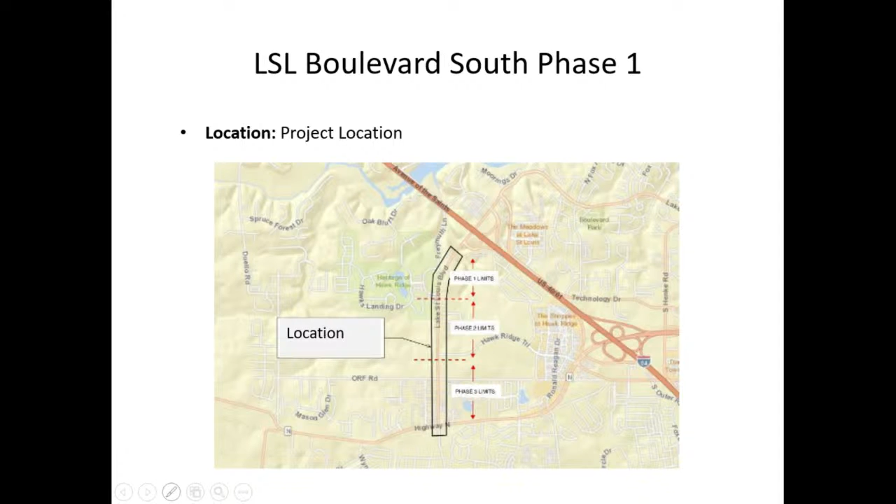We have one project that we're submitting. It's Lake St. Louis Boulevard, Phase 1 South. On the screen is the project location map for the entire project. The application is for Phase 1, which is the northern section of the project.

I'm going to start with a little background information from the study that the city just recently completed. We had Oates and Associates and CBB do a study on the Lake St. Louis Boulevard corridor to tell us what type of improvements we need to handle the traffic and future development in the area, as well as look a little bit at some of the surrounding transportation network.

Starting with the existing conditions, we have an existing 2-lane roadway with shoulders and open drainage along the majority of the route. The eastern right-of-way line has a bike path located along it, and on the western right-of-way line there's intermittent sidewalks.

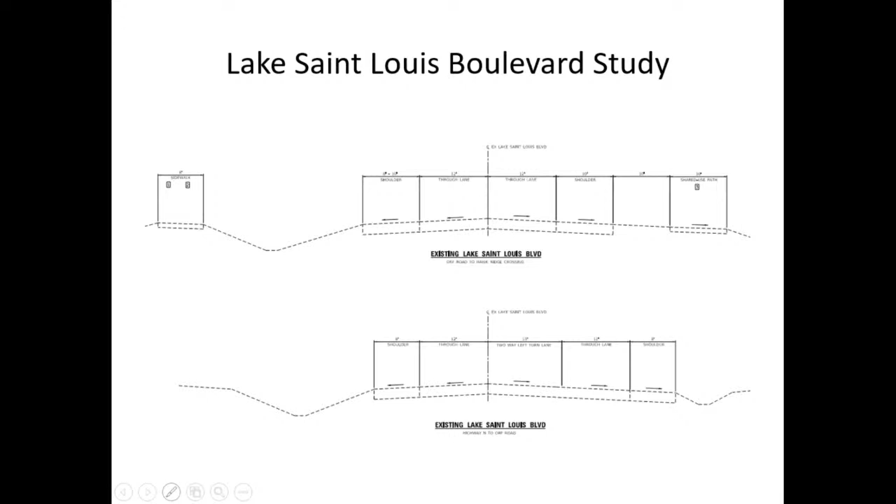So the plan for the next few years will be applications for phases of Lake St. Louis Boulevard that will be 3-lane sections, preserving the right-of-way for the ultimate 5-lane section, and setting the sidewalks and bike paths out at the edges of the right-of-way line to try to establish the limits of the boundaries of the corridor so the adjacent property owners have that expectation and understand where their property ends and where the city's right-of-way starts.

The study also looked at locations where we can allow signals in the future. It's important that we pay attention to where we allow signals so that we have adequate spacing between them and things function well, and looked at some connection points that we need to make in the surrounding road network.

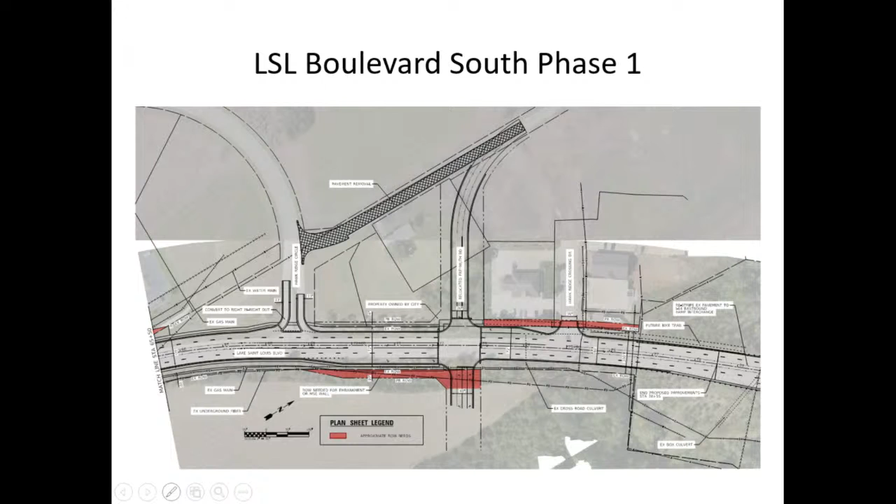The existing Freemouth Lane, we haven't firmly decided whether that will be removed or whether it'll become an access point for development at that location, a driveway access for the east or west side of that road, or a cul-de-sac. We'll have to figure that out, probably in consultation with the property owners.

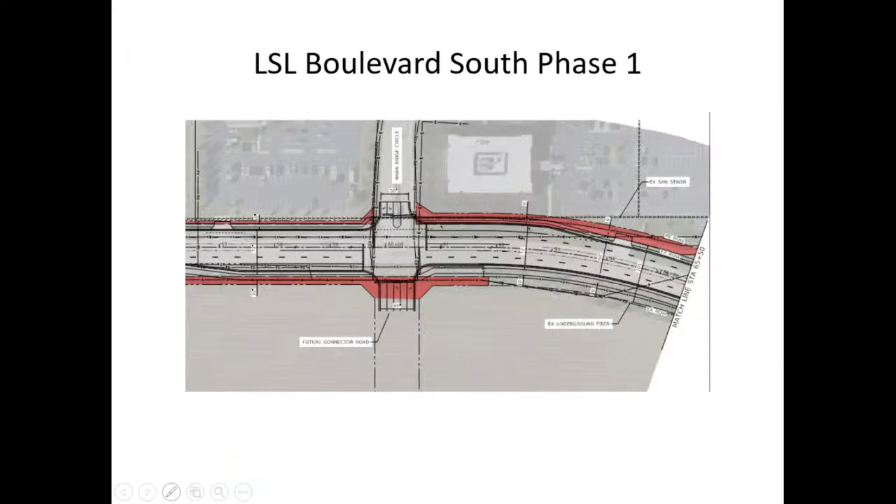Can you go back to the map that shows the... no, the other map? Nope, no, no. That one. Yes. So all of the blue lines and the blue dots - is that for a future possible configuration of some interior roads when the property's developed? The blue lines, I'm sorry, I didn't hear you very well. The blue lines, what are the lines?

The light blue lines are future projects. Orf Road, on the south of the photograph, we anticipate upgrading that road. We'd like to realign it so that it continues through and connects up to Ridgeway at Hawk Ridge Trail. That's undeveloped land right now. We've got a proposal for development in that area that we're working on, and we're trying to coordinate with them. The alignment won't look like what you see here, but it will make the same connections.

The line that cuts across the undeveloped area realigns Hawk Ridge Trail and then brings that up to the new intersection that we're creating. That's in our city comprehensive plan, and that's something we want to see when that property is developed.

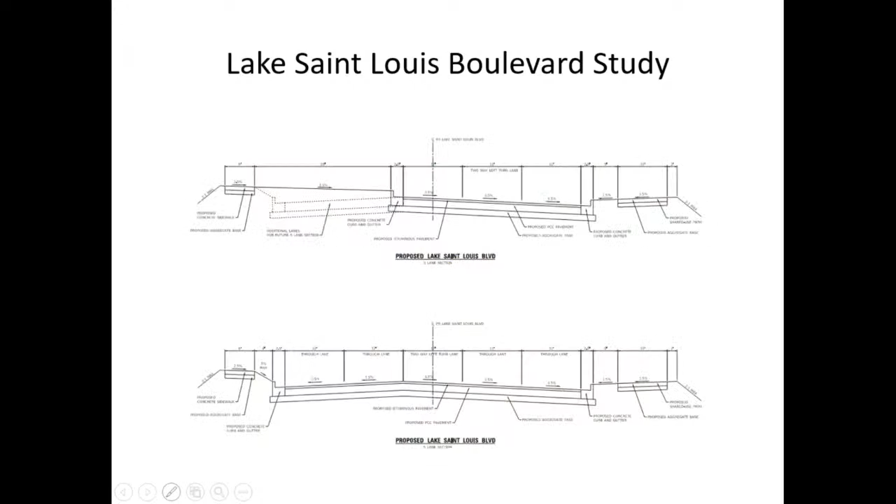What about on Freemuth, the road you're gonna realign up at the top? We don't anticipate that will change very much. Yeah, I wouldn't think it's not a very high traveled road. There's only a couple of neighborhoods down there, correct? Pardon me? A couple neighborhoods down there. Yeah.

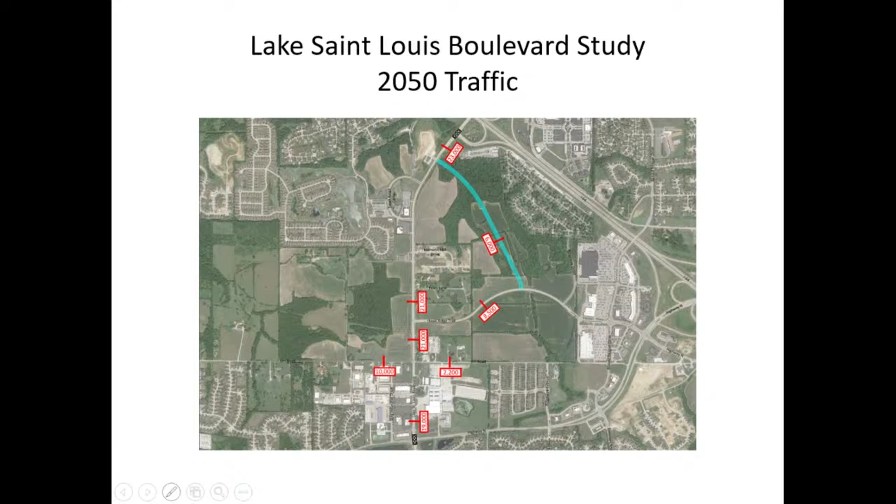I don't want to say a number, it's all residential. I think the objective there is twofold. One, Hawk Ridge Circle, we can't have signals at both legs because those signals would be too close together, so we want to pull those signal locations apart. The other thing we're trying to accomplish is in the very long range plan, 20, 30, 40 years from now, someday hopefully somebody will find a way to have an outer road that connects through here, so those areas don't get developed and we preserve that corridor. We're trying to set that up today so we have a roadway network that can be improved in the future.

Thank you. So I have a question. On your traffic lights, where are all those locations?

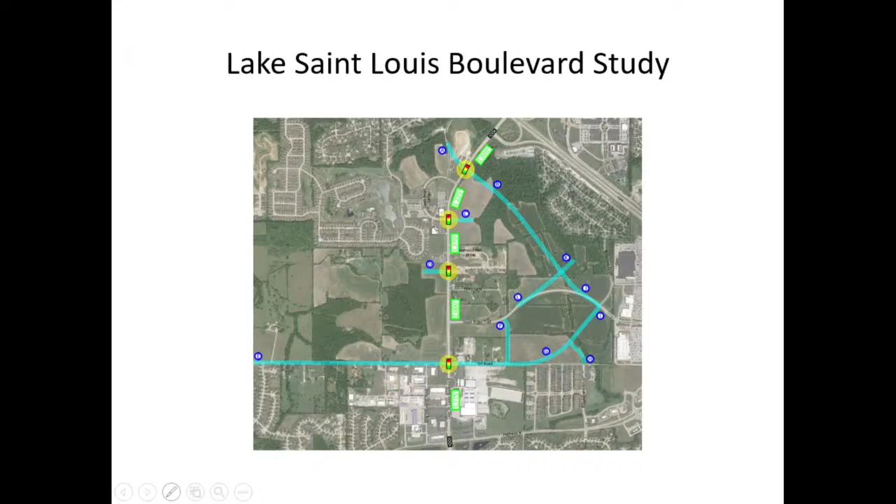Good afternoon, road board members. I'm Chris Clerks, Capital Improvements Manager for the City of O'Fallon, and I am here to present the projects that we submitted.

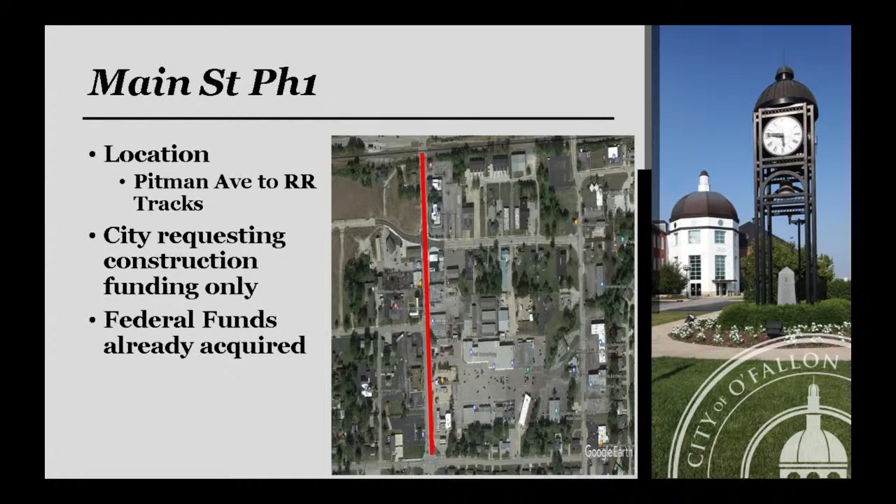It goes from Pitman Avenue to the railroad tracks, right before City Hall. We're only requesting construction funds on this one because we already have the federal funds acquired, and we're in design and right-of-way acquisition now, so we'd be going to construction here hopefully at the end of this year.

As far as existing conditions, Main Street has an ADT of 23,000, so it gets a lot of use. It's getting to be deteriorated. We've had some water main work that has actually caused some repairs to be made in the road already, so we're just going to try to overlay that whole area and resurface it.

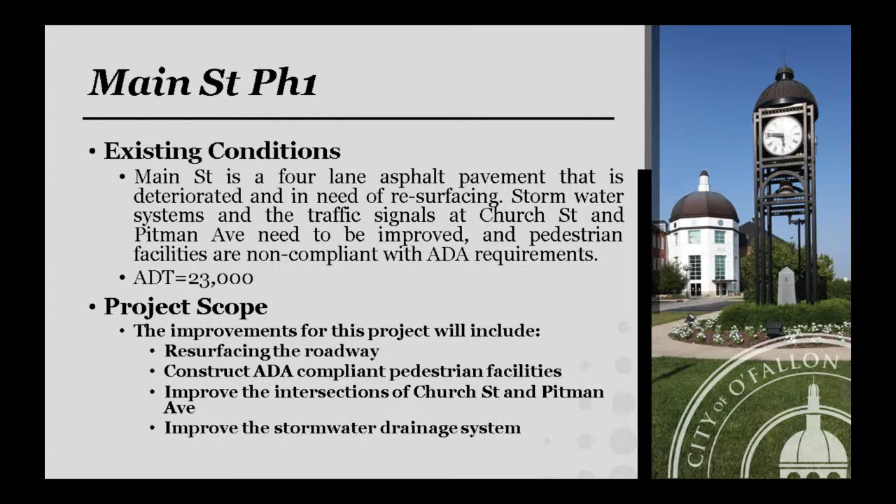We also want to put some revised signal improvements at Church Street, and improve our pedestrian facilities that go through that area. And then also improve some stormwater drainage that needs to be upgraded since it's all pretty old through that stretch.

As far as Main Street Phase 1 - so you're not changing the road at all? No, it's simply a resurfacing, and we would go back with the pedestrian improvements. Those are the big ticket items. The stormwater obviously is a big ticket item too, but it's mainly a resurfacing job.

And the same thing with Main Street Phase 2, essentially it's a resurfacing job. We're not adjusting the roadway widths at all. We would be going back...

This one is actually located between Pitman, and then goes south to Terra Lane, closer to 70, tying into all the new stuff that was done as part of I-70's project with Phase 1 for the Highway K Interchange. Construction funds only, again, because we already have the federal funds for this one.

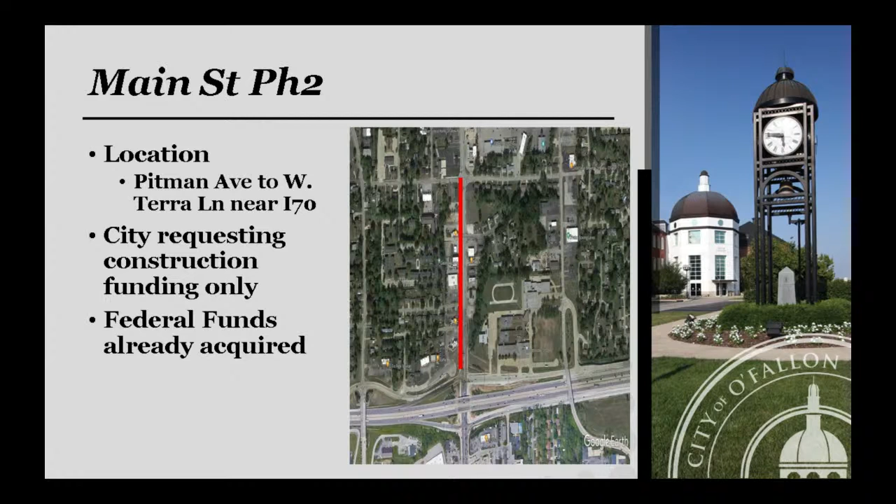ADT remains the same, and one of the things we do want to do is improve our pedestrian facilities through there, because we were able to get connectivity through going underneath I-70 with the interchange project, which was a big obstacle that we have finally overcome. So we want to extend that movement as best we can through the Main Street corridor.

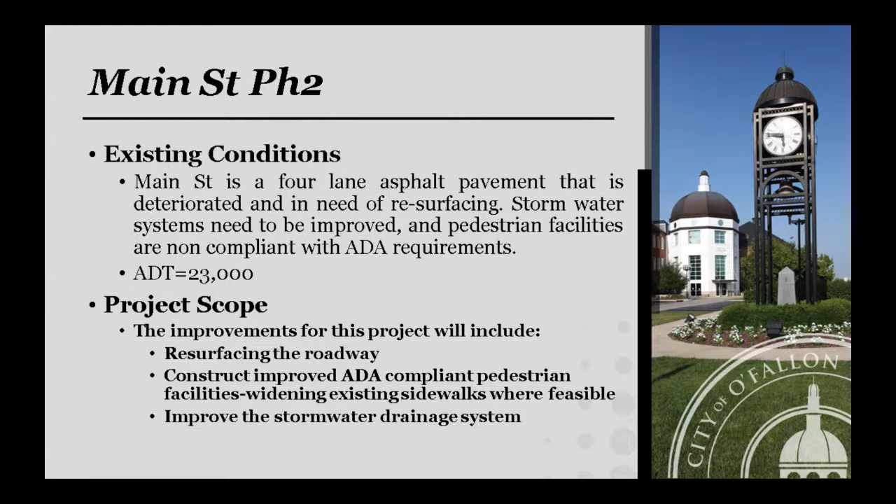One of the ones on the western portion of the city is Diehr Road. This is actually at the intersection, starting at the intersection of Hopewell Road, and then it would travel west, and it would actually go through a proposed development.

I think it's called Harvest. That Harvest development, I think, ties into a future county development that's up there, which I cannot remember the name of. Autumn Hollow? Okay, thank you. So it would be connectivity through that. It would be a county, city, and developer partnership.

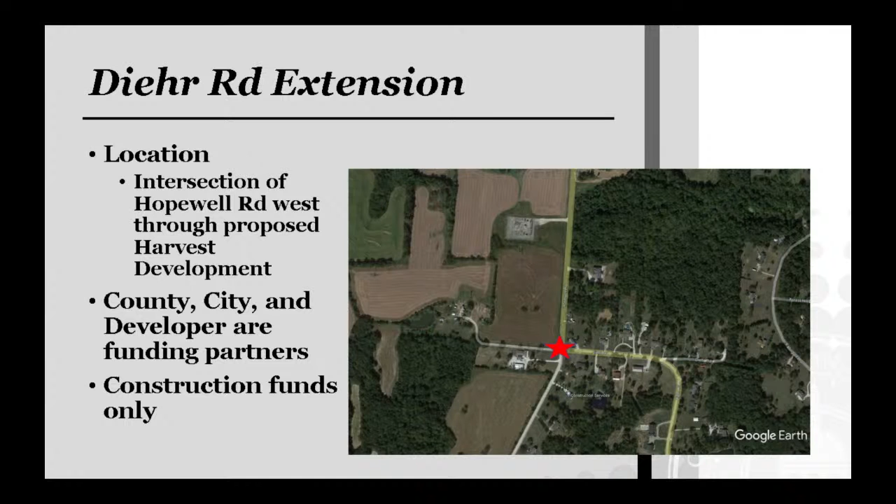And we'd be looking for construction funds for that. Harvest Development is planning on getting going here in 2022, and this road would extend through there for the connectivity I was talking about, through the subdivision and to the other St. Charles County subdivision. It would install a new roadway with pedestrian improvements.

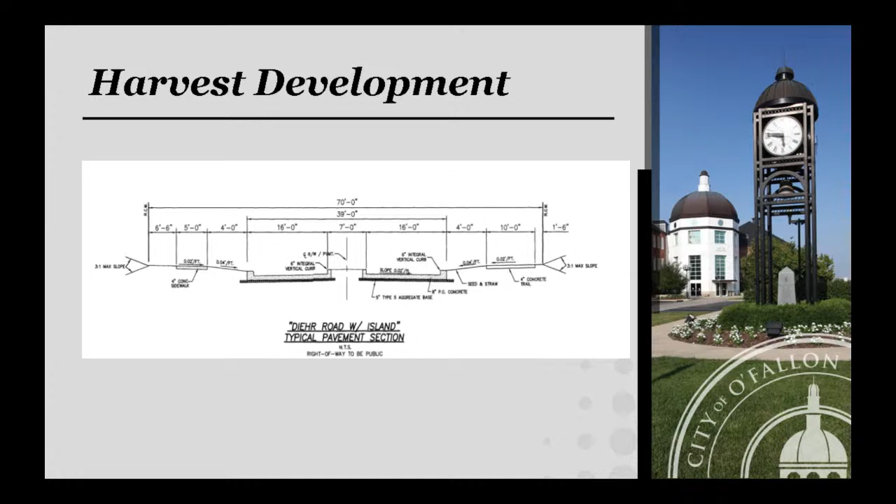And we would be looking for construction only on this one, so it ends up being a 55-35 split - 55 being county road board, 35 being the developer, and 10% being the city. So that would be the Diehr Road extension.

We have also submitted the Diehr Road reconstruction, mainly because of all the conversations we've been hearing and seeing develop along the Hopewell-Diehr Road corridors. We're aware of Lake St. Louis Phase 3, which would come down to Highway DD whenever that's built. MoDOT's had some plans to improve that intersection in general.

So we want to start trying to improve Diehr Road as a whole, and we need to look at that on the design side. We're only asking for design funds at this time because we know it'd be a phased construction—it's too large a project to construct all at one time. But if we can design it all at once, we'll know what we need to plan for as far as right-of-way needs properly and accurately, and also construction costs in the future.

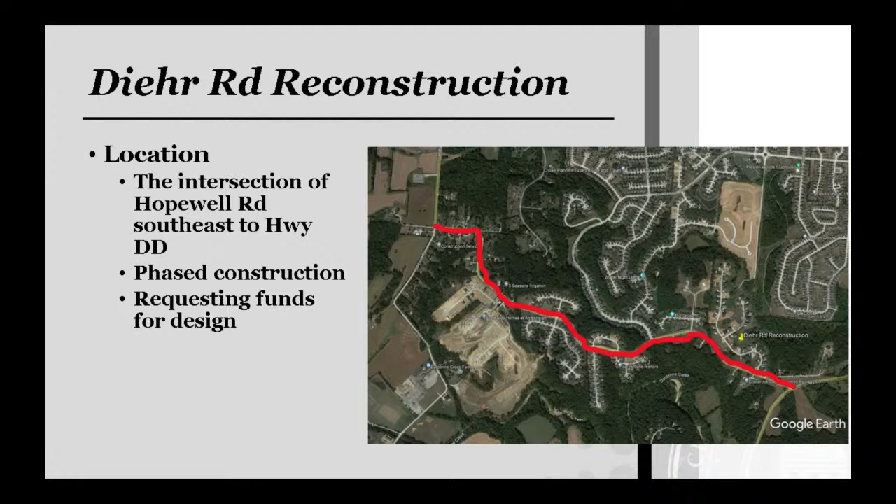O'Fallon does have some developments already built where right-of-way is established, so that's good for us. I think we've got at least half of some of the right-of-way established through here, so we would carry that through. But there are some areas that are still county in this area and down in this area that we'd still have to evaluate the best avenue for us to proceed with on this one.

It's basically generated because of the amount of development we're starting to see in the southwest end of our city, connecting to other adjacent municipalities. Right now it's just a small 2-lane asphalt road, no shoulders, and pretty tight. It's got a lot of horizontal and vertical curves to be addressed and evaluated.

To see what we can do to help those for sight distance reasons and whatever else. We also want to get a pedestrian facility that would connect into that harvest development, getting across Hopewell. We feel it would probably be very similar to that, maybe not like a median installed, but at least a 2 to 3 lane cross section. We just haven't landed on that officially yet.

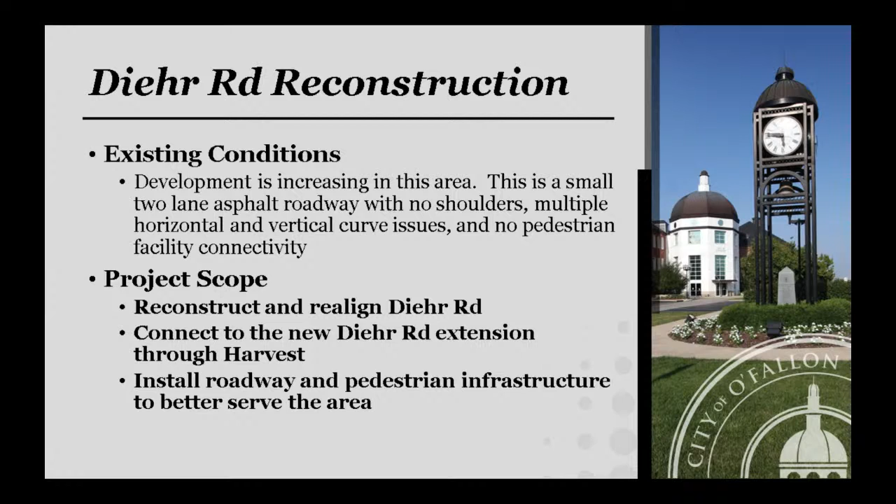The cost breakdown for that, again this is design only, so we'd be looking at an 80-20 split on this one—about $500,000 from the county road board to help us with that effort.

Another project we're talking about is West Terra Lane realignment. This had started in conversations tied to a larger project, but we're breaking this out for the city to evaluate it—it's still a very large project, but it's a little more reasonable to look at it this way.

It would be to try to realign West Terra, which is right there at the Bryan Road interchange. It gets stacked up really, really bad with traffic during peak hours, but it's just a constant flow of traffic through there with truck traffic going into our North Central Industrial Park and all that. We have a high school very close by, so we have a lot of stacking with vehicles too.

So design funds essentially would be requested for this one, so we could try to realign West Terra somehow to pull it away from I-70, because it was built really close, and it's hard to get people through there when everything is so tight.

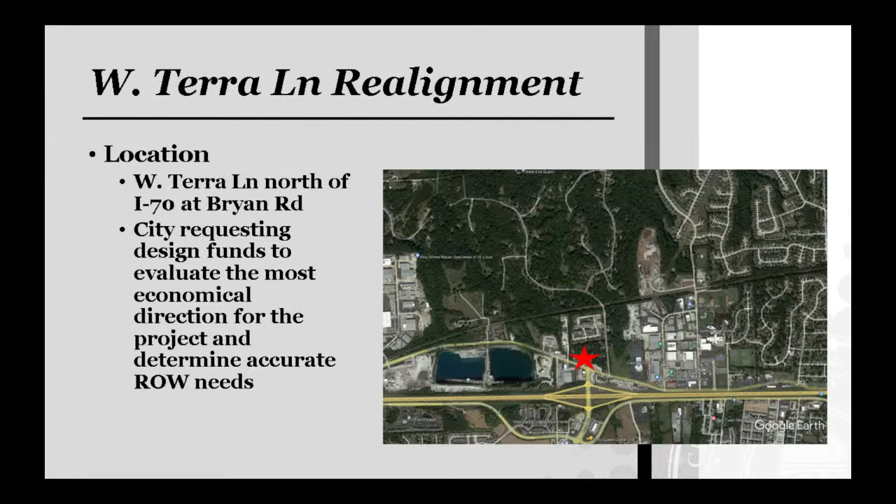Designing it would give us the ability to accurately depict what we need for right-of-way, hopefully 100%, and then also accurately go into construction with it, because this will be a long-term project for us. Our construction estimate is ballparked around 12 million, but that could fluctuate with today's market. Currently the ADT in this area is about 10,500.

Like I was talking about during peak times, the biggest advantage to just doing the design right now and trying to figure out the best avenue for this project would be to accurately move forward with it instead of us just taking a dart, throwing it at the wall and seeing what sticks. We want to try to do this as best we can, because it will impact people.

As far as that, we estimated that amount for the design, so we'd be asking an 80-20 split on that one, so about 1.4 to help us with that.

Is that a big number for design?

For a project of this size, we feel it's pretty accurate. So, yeah.

As far as the last project we want to talk about, Tom Ginnever Avenue on the north end of town and then Cool Springs intersection. That would be generally located right there, and we would actually also probably apply for federal funds. I think this would be a good project to do that for, either STP or CMAQ.

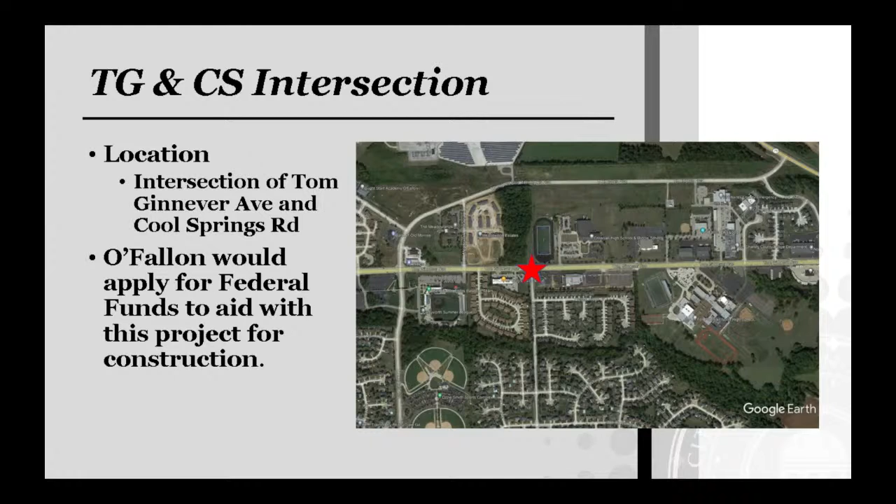Right now it handles about 18,500 vehicles a day. Significant delays occur because it's a stop condition, so it's pretty slow moving through there.

We'd like to get into the design, and I'll show you a picture here in a minute. We originally anticipated just doing a roundabout. There might be some complexity to that one, so we're also going to look at and evaluate if it would be better to just do a traffic signal and get it timed right.

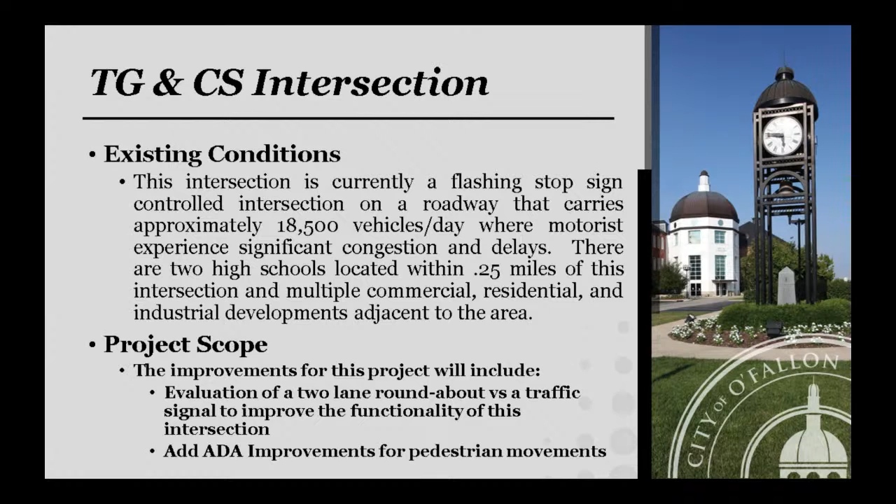So we want to look at both of those, but get into design, figure that out, get ADA improvements through there because we have kids walking up and down this road all the time. We want to make sure that's as safe as possible too.

This is our generic roundabout layout that we tried to put together. We've got some utilities right in this area that are a little bit hairy, so that's why we want to look at possibly doing a traffic signal instead. Whatever fits best and whatever's the most economical and is going to function the best for us is what we'd move forward with.

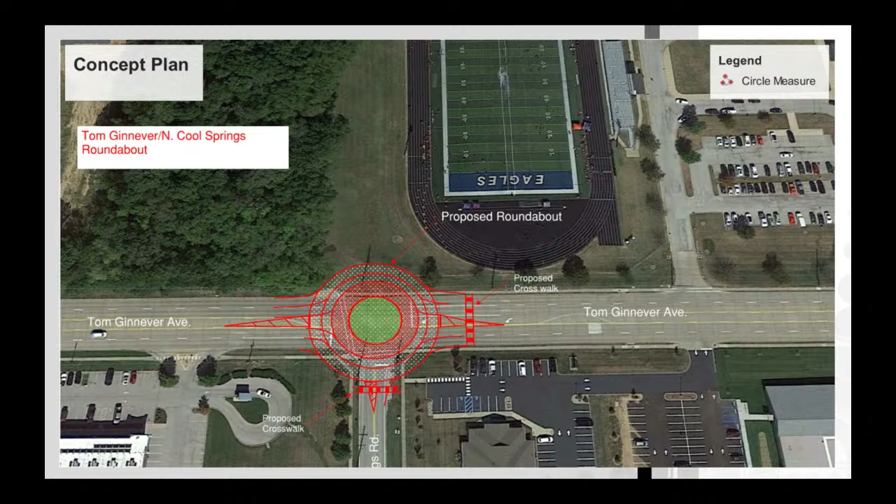But we would come at a later date for any construction funds on that one. These pictures don't depict any of the stacking, but I was unable to get them before the presentation, so I apologize, that's just the general look. This is the flashing stop sign situation we have.

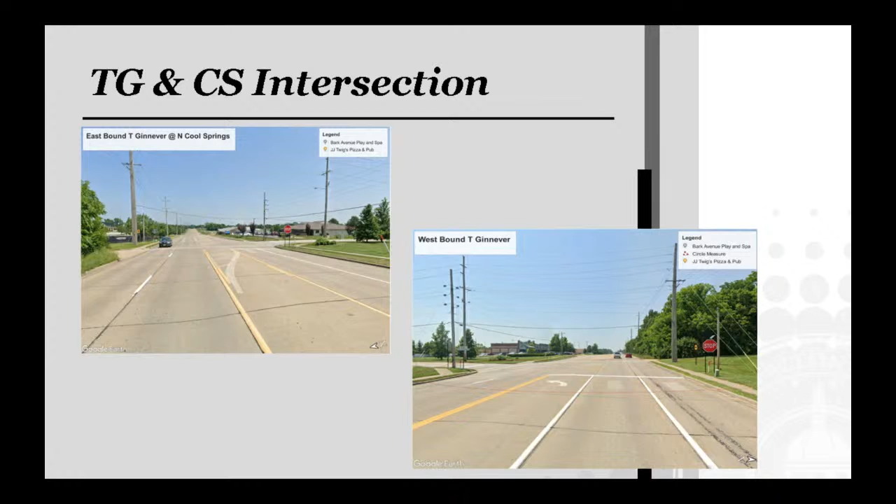And then we'd be looking, this is a full program, design, right-of-way and construction. We'd be looking at an 80-20 split, so that's about 1.1 million that we'd be requesting from the county road board.

And that's where we hope we get good bids, but it's kind of a shot in the dark sometimes. Phase 2, we're starting design this year using those federal funds, so we have a couple years, so we think we have some time to evaluate that project and see what happens with the right-of-way and construction. Right-of-way is tough on those two projects, just because everything was so tight, so that would be our priority list. Is there any questions?

Diehr Road extension, that's basically a subdivision road, am I right? Essentially, yeah, it would be a subdivision road. It's costly, the subdivision road being a promenade with a median down the middle.

It would be similar to Duchesne in St. Charles, where we're asking them to, instead of building a subdivision road, make it a collector road so that it will eventually extend all the way to Route Z. So it would be from Route Z to DD. But still, as it's constructed, it would be more or less a subdivision road.

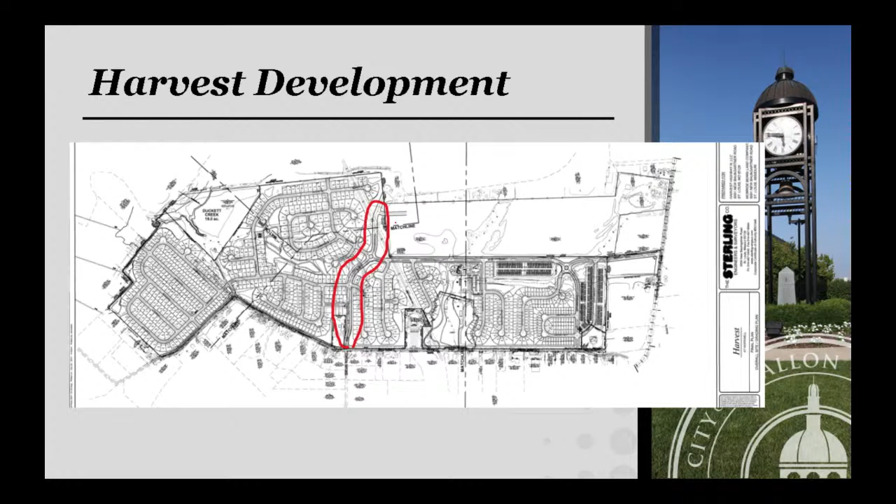I think Duchesne also has a median down the middle too, and it was built the same way. We'll look at that. Not North Duchesne, through towards Melwetter Parkway. In Provence, the new part, because that was the same deal, those 55-35-10. Yeah, okay, anyway we'll look at it.

Any other questions? Thank you very much. Thank you.

Moving on, City of St. Charles.

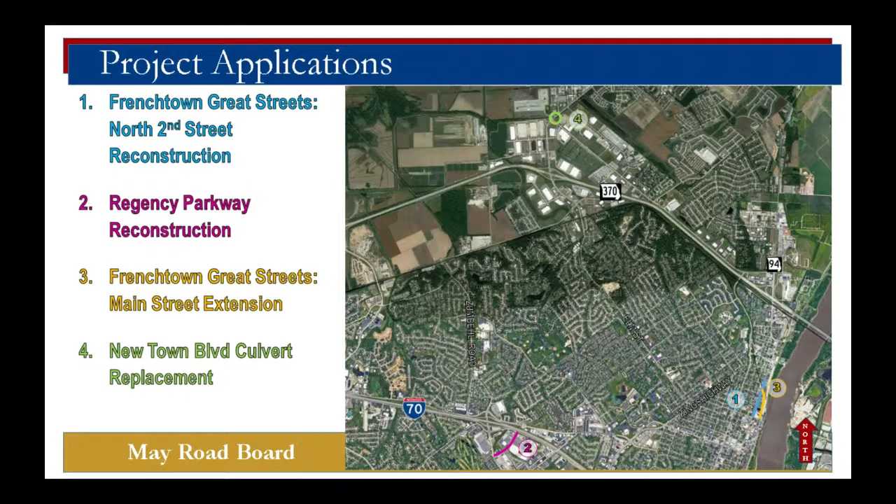The second project is Regency Parkway, down here to the south, just south of I-70. And then the other one is New Town Boulevard Culvert, up to the north side of town, just north of 370. So the first one, the North 2nd Street Reconstruction.

The drive lanes of asphalt pavement are not in terrible shape. It's the parking lanes adjacent to the drive lanes that are pretty rough, cracked and deteriorating. Some of the curbs are in bad shape. There's also some strange variable height curbs—some very tall, 10 to 12 inches high, and then some areas where it's very low, only an inch or two.

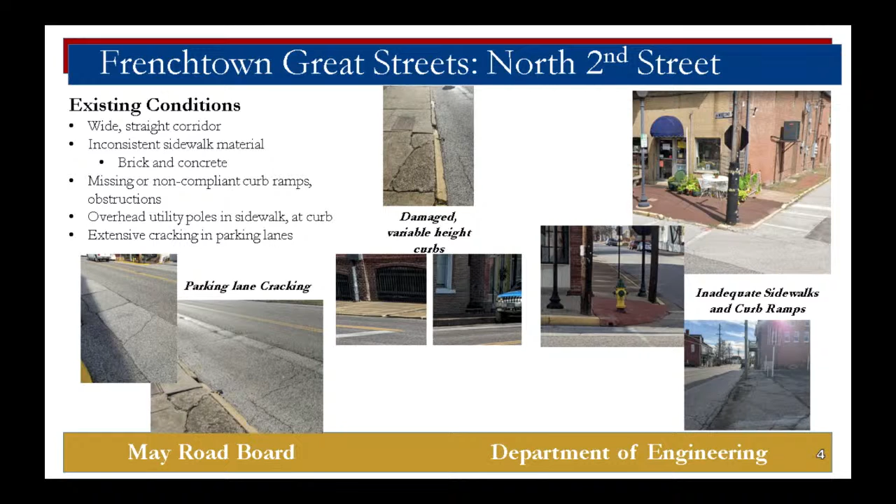So what we're hoping to do is take that existing corridor, same width, 38.5 feet wide, and neck it down to just two drive lanes, a little bit narrower, 10.5 feet wide, with close to 9 foot wide permeable paver parking lanes on either side. As I mentioned, the drive lanes are not in terrible shape, so we would just resurface them, and then convert all of those sidewalks to concrete with a brick band at the curb to keep with the aesthetics of the historic area.

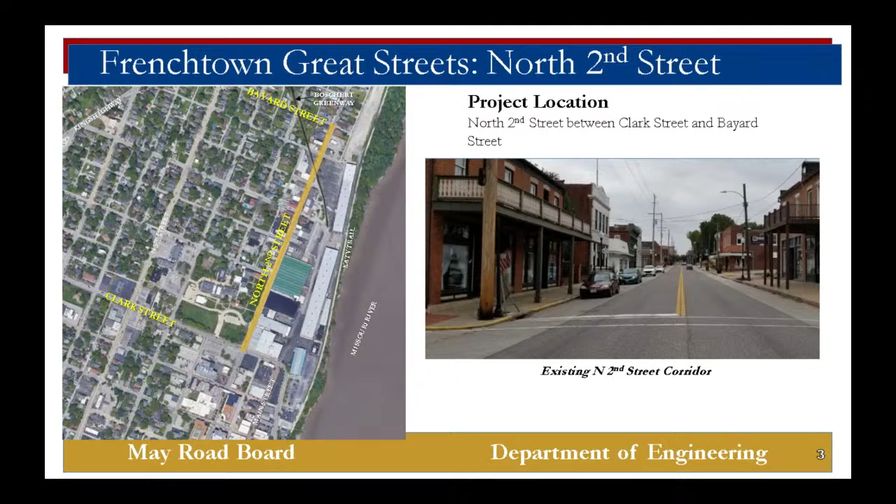I forgot to mention on this photo that this project is situated right between two significant trail networks. You can see the Katy Trail running along the Missouri River, and then this darker line, which used to be a railroad spur into the ACF property up to Lawrence Street, was recently converted into a trail, an extension of the Boschert Greenway.

Part of this project is to extend that trail from Lawrence Street, crossing 2nd Street, over to the Katy Trail. Some of the other stuff we want to do is underground the overhead utilities through there, working with the utilities.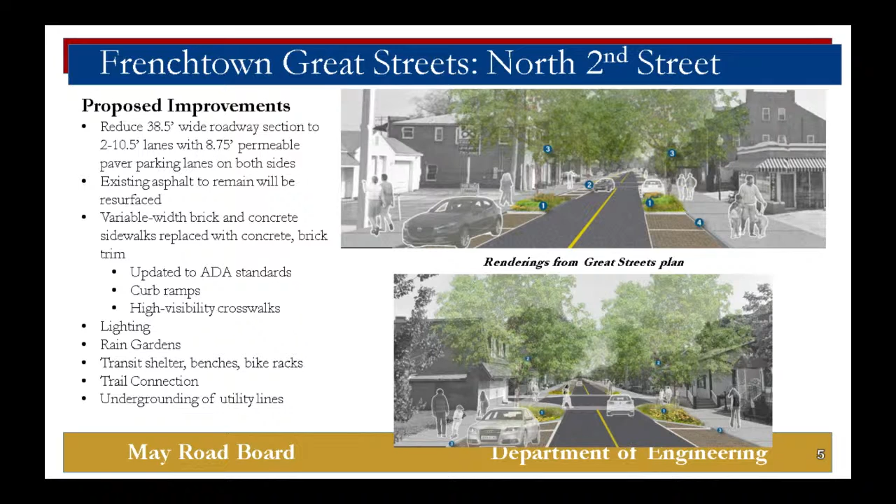There's Ameren, Charter, AT&T, and other fiber all on those poles, so we'd have to work with them. We'd also add some pedestrian furniture, benches, bike racks, and there's a little city park at the northern end of the project where there's a trolley stop now, so we'd add a transit shelter for that.

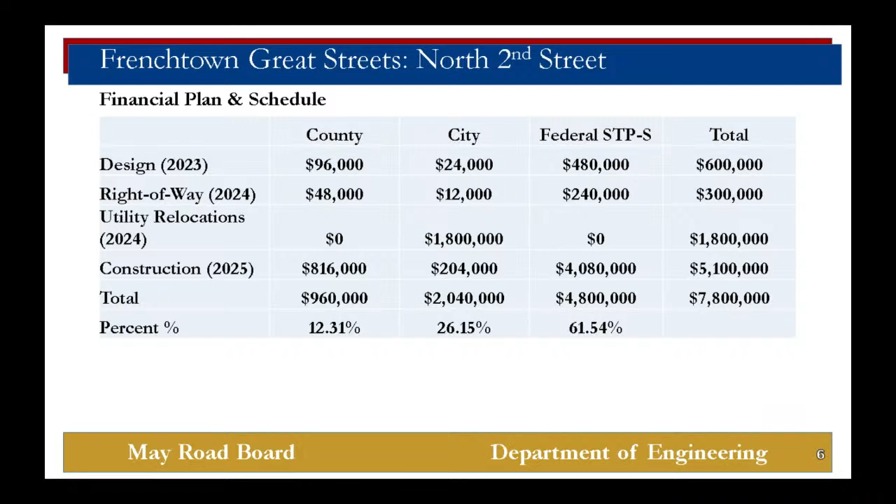So this is the breakdown. We applied for federal funds and were recommended for award on that. We're asking the county for $960,000, just over 12% of the total project cost.

The next one is Regency Parkway, just south of I-70 between Zumbehl Road and Veterans Memorial Parkway. Some of you might recall we came to you with this project last year, but at the time it was not eligible for federal funds because of its classification as a local road. Since then, we worked with East West Gateway to have it reclassified, I believe as a minor collector now, so it was eligible for federal funds this year.

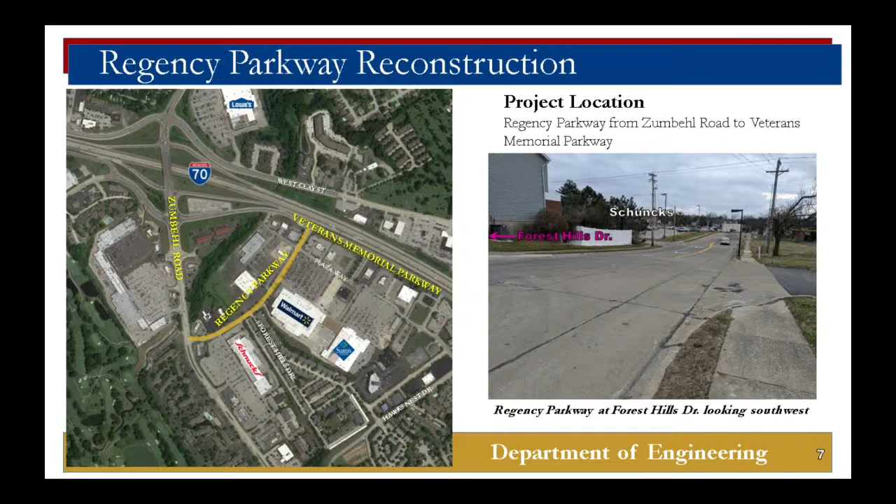This is a look at the corridor now. It's pretty wide, striped with two very wide lanes and some intermittent turn lanes at commercial entrances. On either side of Regency Parkway there's a bunch of commercial development, including Walmart, Sam's Club, and the old Red Roof Inn site, which is currently under construction to be a Chick-fil-A. It's a booming, busy corridor.

The pavement in that area is in really rough shape. Most of the defects are failing joints, some wide cracks have opened up, and there are large potholes. With all the commercial businesses around, it sees truck traffic it wasn't originally designed to handle, so it tears it up. We gave it a PASER rating of 3.25 out of 10, so it's pretty rough.

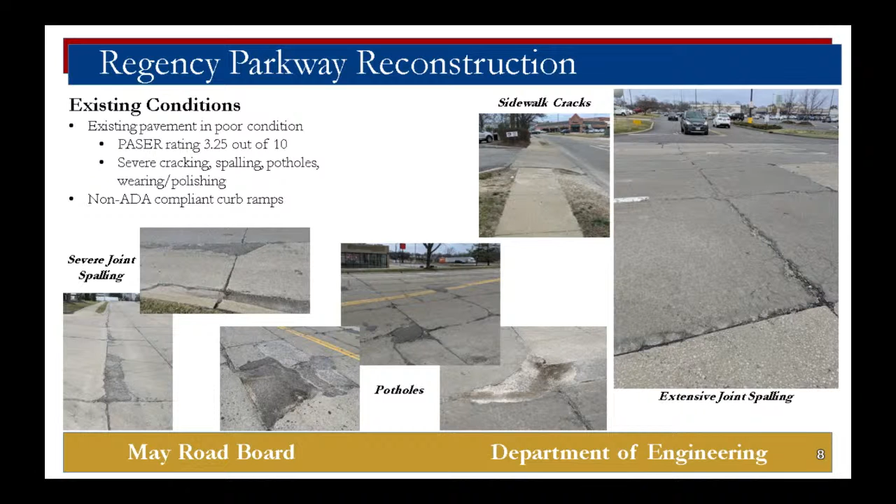There are some areas where vehicles have off-tracked onto the sidewalk and broken it up, plus some non-compliant curb ramps. What we'd like to do is take the existing width of the corridor and replace all the pavement with heavy-duty concrete to support the truck traffic, and replace the rolled curb with vertical curb to add a bit more barrier between the street and pedestrians on the sidewalk.

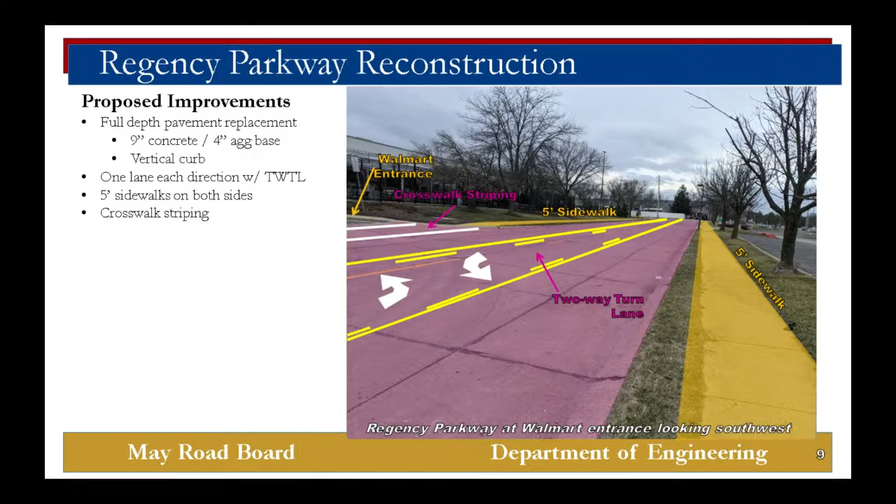We want to stripe it with a continuous two-way turn lane throughout, and widen the sidewalks slightly—they're between 3 and 4 feet wide now, and we'd make them 5 feet. We'd also add crosswalk striping at a couple of cross streets as well as some really wide entrances like at Walmart, to make it a little more pedestrian friendly.

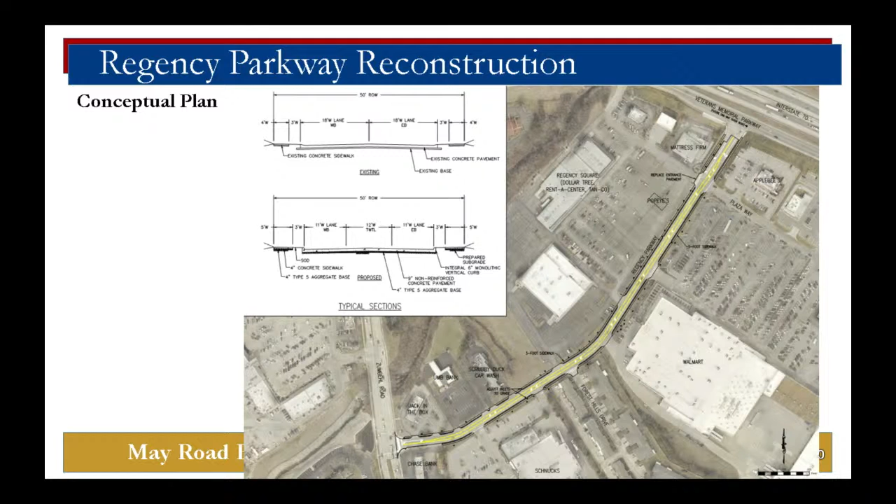It's just a concept plan, basically converting that two-lane section with wide lanes into three lanes.

This is the funding breakdown for this one. Again, we applied for federal funds, now it's eligible, and it was recommended for award, so we're asking the county for a 16% share, $504,000.

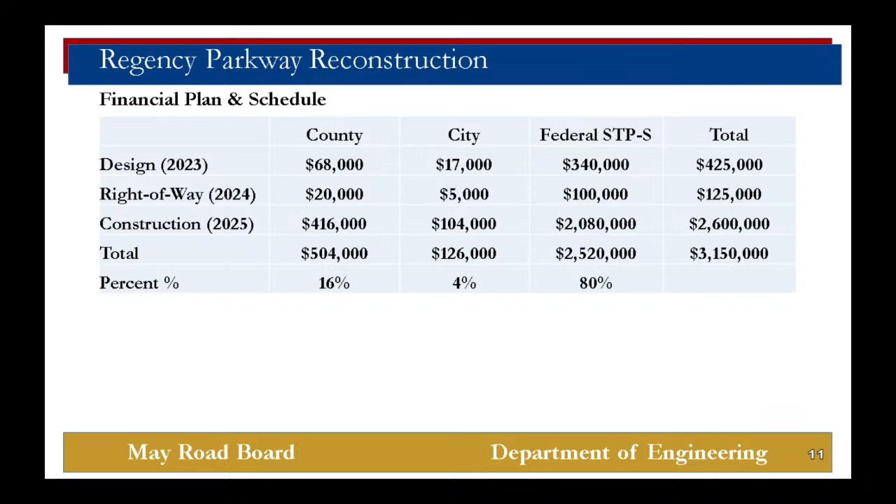The next one is the Historic Main Street extension. This road does not exist currently. It would basically extend through the previously mentioned ACF property between Clark Street and connect up to North 2nd Street at Montgomery Street.

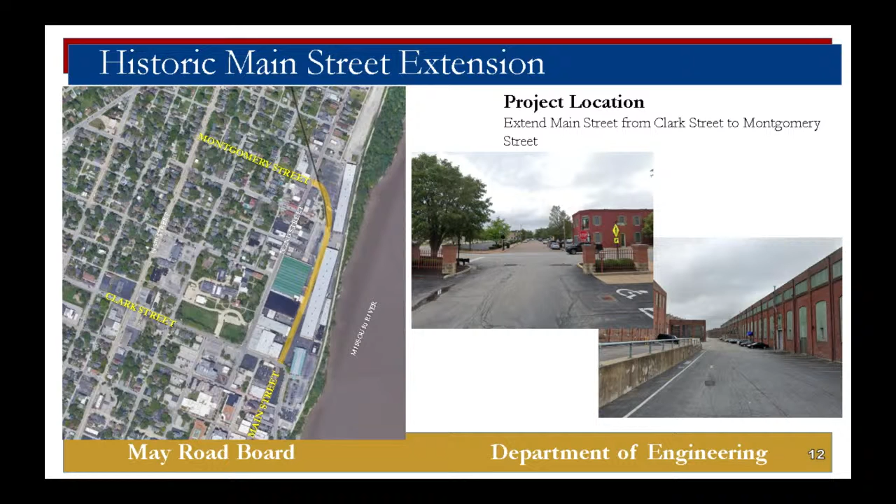So what we would like to do is add two 11-foot wide asphalt roadway lanes with curb and gutter, keeping with the same aesthetic as the North 2nd Street project, add concrete sidewalks with a brick band, and add some lighting. There's also opportunities here for on-street parking, consistent with the 2nd Street project, using permeable pavers.

There's a few utilities overhead here that we would underground as well, and add some lighting, of course. These are just some images from the Great Streets plan showing the materials that would be proposed through here.

The project also would include these side street extensions connecting between North 2nd Street and Main Street. There's three or four of them there. This is a breakdown here.

This project was not federal fund eligible because it's also not classified. It doesn't exist, so we'd have to work with East-West Gateway to get the future road classified before it would be eligible. At this point, we're looking at a 58-42% split, with a $4.64 million request from the County Road Board.

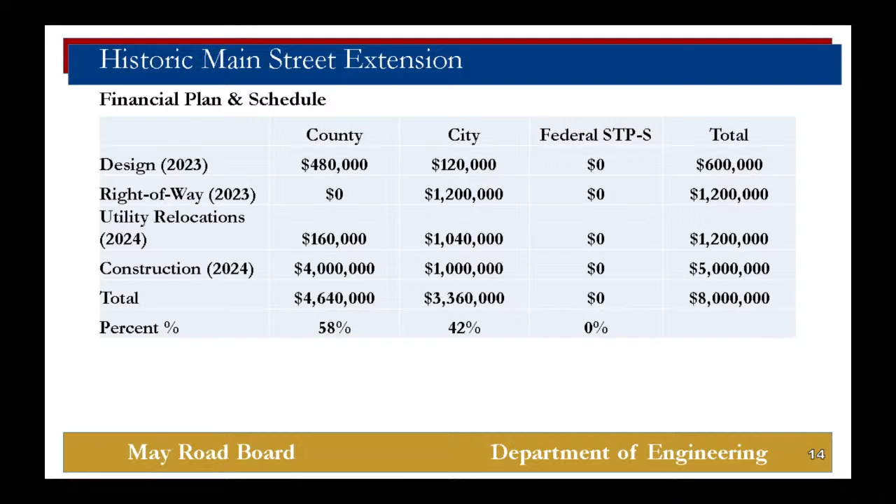And finally, is there some plan for redevelopment down there? We're actively looking for opportunities for redevelopment, yes. There's not anybody on board currently, but lots of interest. We met with Jim Unger last week, who owns the entire ACF property.

There's potential redevelopment of the building north that's currently in Olympia. There will be a building complex on the north end. There's a group looking to do that. There's also a group looking at buildings 90 and 91, the two buildings south of that, to do apartments, or redo that building as apartments. So there's pieces of it coming together. Mr. Unger is working with the city to allow for this road to go through his property.

So what's the focus of the property going to be? Another entertainment district, or residential? Yeah, it's a mixed-use sort of development.

The building at the bottom, the brown building, is a current office building, and it'd be continued to be used as an office building. We see the blue areas as probably more retail. There's what's called the powerhouse building close to the river, probably ideally sized for a two-story restaurant type use. We have Climb So Ill, which is the blue portion of that longer building, 90. That's currently a good use for the entire area.

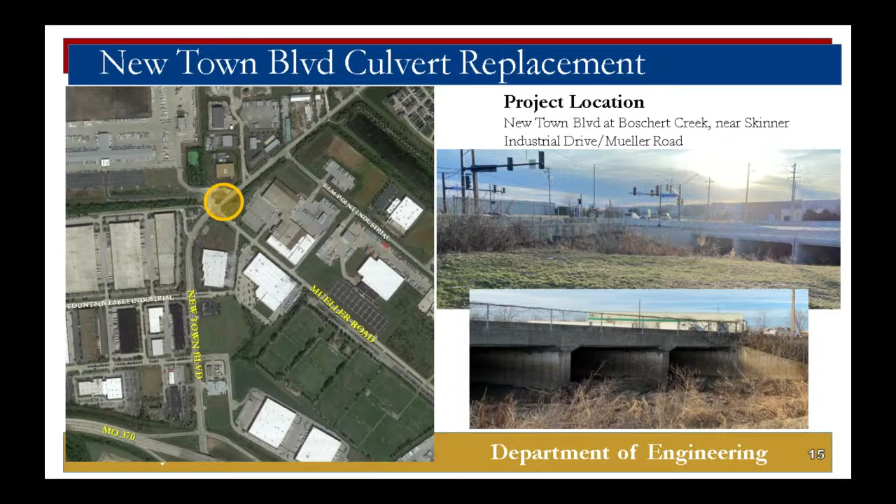The existing conditions: it's a triple cell box culvert, and on the 2020 MoDOT bridge inventory, it was given a rating of 6, I believe on a scale of 10. The concrete pavement over the culvert is in rough shape, with some big cracks and potholes forming.

This area also sees a lot of truck traffic. There's a FedEx facility where the Skinner Industrial road goes, and up north there are a couple other trucking facilities. So there's a lot of wear on the pavement, in addition to ongoing residential development going on to the north, plus traffic on New Town itself.

It's also poorly aligned on the creek. There's this 90-degree bend that comes into the culvert at the creek, so a lot of silt settles out in the culvert, reducing capacity and causing issues upstream.

Kind of skipping ahead, but one of the things we did with the Skinner Industrial culvert was realign it on the channel a bit, so it would facilitate an extension of that culvert across New Town Boulevard as well, better aligned on the channel to hopefully help with the siltation.

This current culvert doesn't really have any pedestrian facilities to cross the creek. You can see in this photo there's a 1 to 2 foot wide area between the head wall and the barrier that you can't really walk on. On the other side there's a bit more room, a couple feet, but it's not paved and there are no sidewalks leading to it, so it's hard and not very safe to cross there.

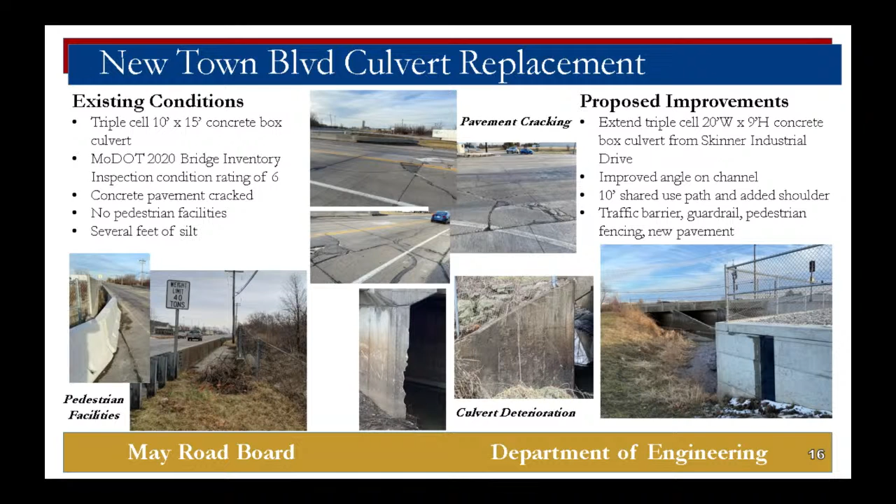The project also includes new pavement over top, plus all the essential guardrails, pedestrian fencing, and traffic barriers required. This one was eligible for federal funding and we did apply, but we were not awarded the federal funds this year. Our application had assumed we would get that funding, so today we'd like to request a modified ask of an 80-20 split for a county share of $2 million on this one.

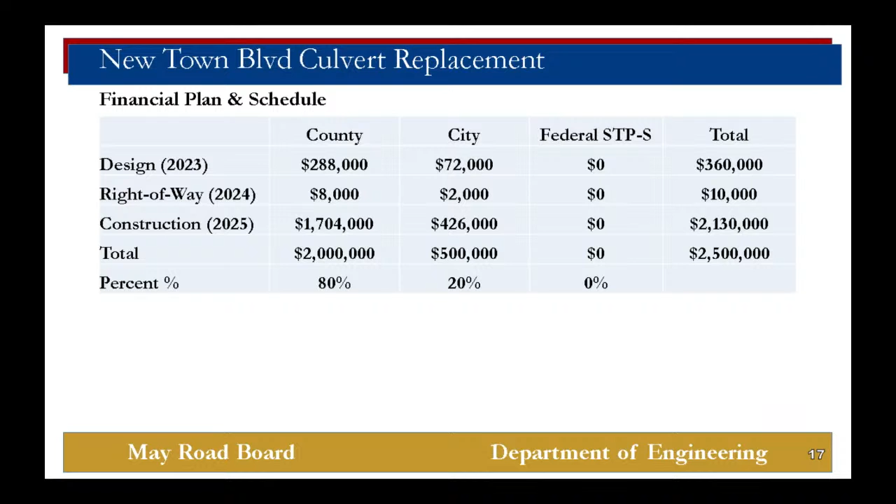So with that, any questions? I had one question on the Main Street extension map.

There's a line item I wanted to ask about on the project estimated cost, for restoration of seed and sod. It looks like it's all pavement on this plan. So I was wondering about that line item of $100,000 for seed and sod. I know there are some green space areas down by the Foundry Art Centre that would need to be restored, and I think we also thought maybe in lieu of some of the brick we could put some green space in the buffer areas, but that's all I can think of that would have been for.

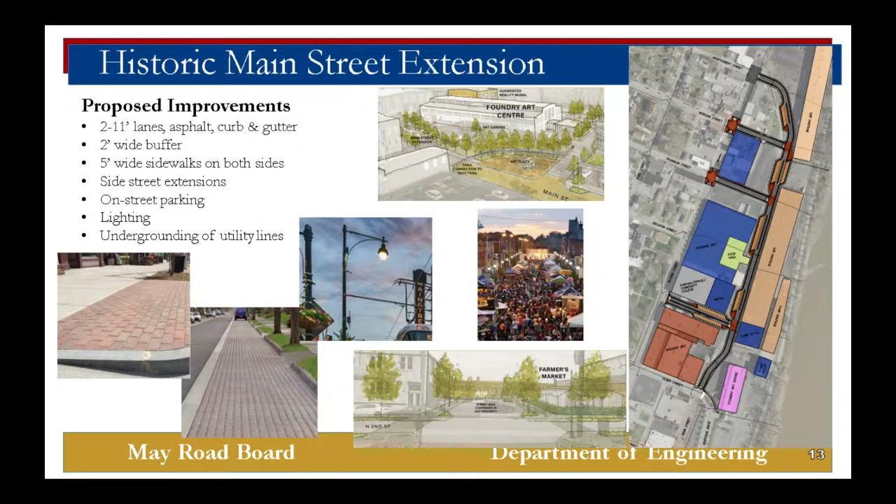Okay, thanks. Any other questions? Great, thank you very much. Thank you.

We'll finish with the city of Wentzville.

Good afternoon, my name is Matt Wahlberg. I'm the Director of Engineering for the City of Wentzville. We have 3 applications before the board today. One is an intersection project, and the second two are resurfacing projects with the addition of some shoulder and some other safety improvements.

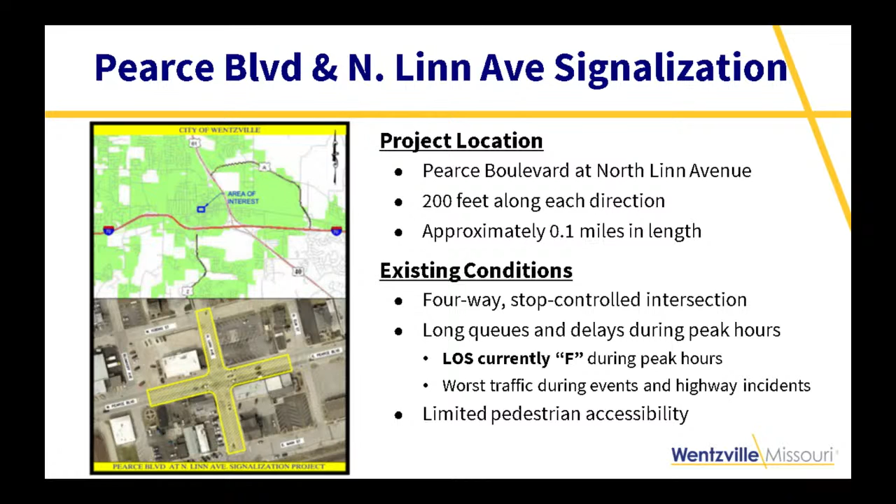The first project is at the intersection of Pearce Boulevard and Linn Avenue. If you've been to downtown Wentzville and crossed the railroad tracks, you're on Linn Avenue. If you go to Wentzville Days this weekend, you'll be right here. This intersection is currently a 4-way stop control intersection, and the level of service we found with a traffic consultant is currently an F, which is failing.

Here are some pictures of the intersection today. We have curb ramps, but it doesn't take an engineer to look at the crosswalks and say those are just not wide enough. We have a fairly big congestion problem here, especially midday, and when school gets out from the north, there's a school and the traffic increases that way.

A little side note here. I haven't been with Wentzville very long, but before I started, I saw some of the projects on the list, so to get familiar with it, I went to Google Maps and started looking around. The 2018 images of this intersection were what I first landed on. Wentzville had this decorative fire hydrant program at the time, and there was a fire hydrant on almost every corner. I thought, how in the heck are we going to put signals here? We've got to move all these hydrants — but they're just decorative, so that was a relief.

But for better or worse, we do have utility poles in the way. So my fears were not fully resolved, but we do have some utility relocation that's going to happen, though I don't think we're relocating any hydrants. The city does own this parcel here, the city parking lot, and more or less at that trash can is where one of the signals would go.

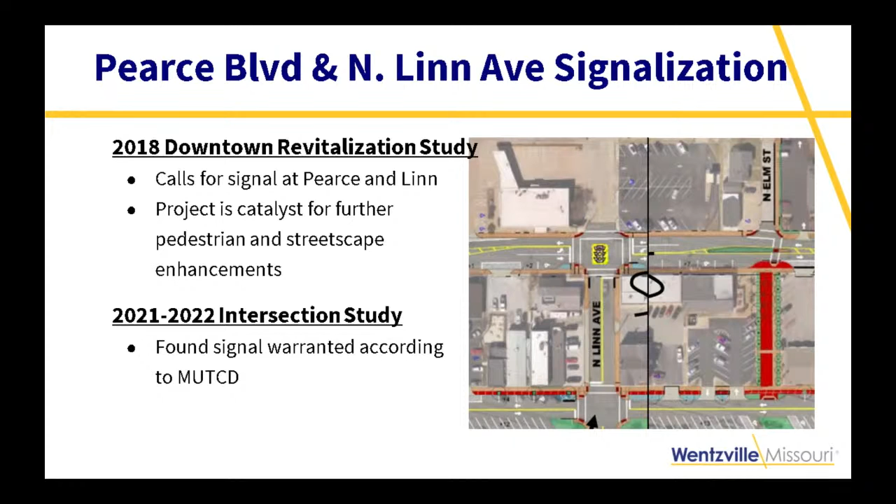This is the preliminary plan of what that signal would look like, with the crosswalks and everything. The crosswalks are a pretty big improvement over the stop control. We'd have APS pedestrian buttons, and there's a certain amount of intersection reconstruction that would happen to make it all ADA compliant.

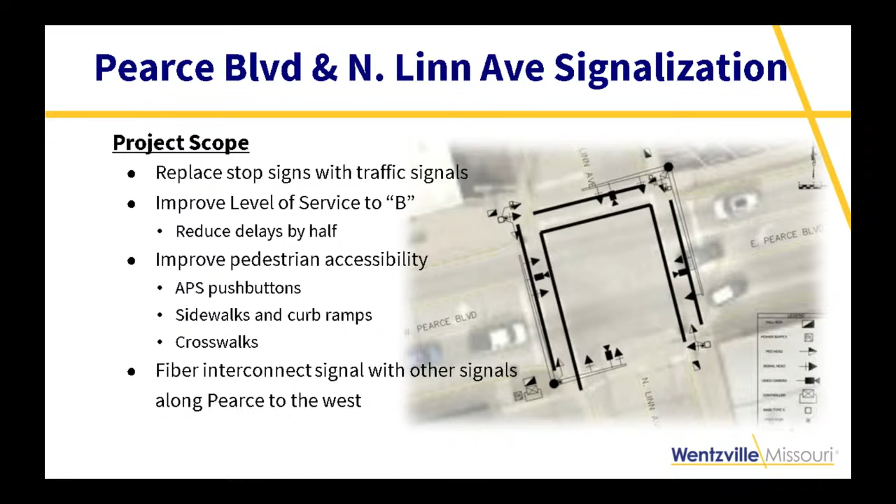We're putting the limits of work about 200 feet from the intersection on all four sides to get those sidewalk tie-ins, and there'll be a fiber interconnect. We're building another signal to the west and will have the fiber connected through there, tied into the Gateway Green Light program. For overall cost, we're seeking 50% participation from St. Charles County. We did apply for CMAQ funding for this project, and in that preliminary list we're recommended for approval, so we're looking at an 80-20 split for the remaining 50% of the project.

Before I move to Pitman — any questions? One: every new signal that goes into the county, is it automatically part of the Green Light program? Yes, it is. So that'll be tied in — they plan to connect it to the fiber. It's about 2,000 feet of conduit to get to that next signal, but it'll be ready to go.

And just following the grant timeline, we'd start design next year and hope to build it in 2025.

Why did you pick Linn? I live out that way. I'm just curious why you picked that intersection and not the one further up by the car wash and the Mexican restaurant. I guess partly because that one's downtown in the plan, one's a three-way and one's a four-way stop. The car wash one is under construction right now, you're talking about Meyer and Linn. We've got a lot of utility work going on there, leading up to getting the signal done.

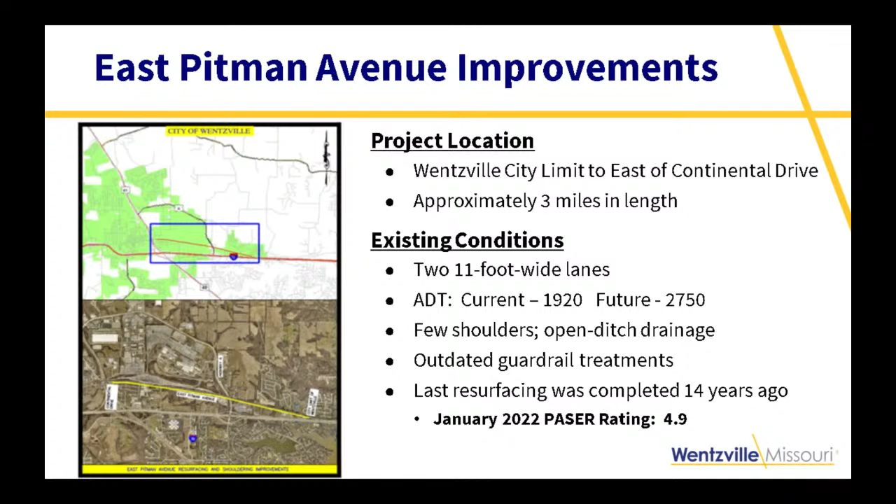We've got a lot of interest in development just on that north side of the highway. It's a lot of green space, a lot of visibility to the highway. We've had some decent conversations, and we do have some projects in progress. We do anticipate that developing over time, not too dissimilar from a lot of areas in Wentzville, but this area in particular.

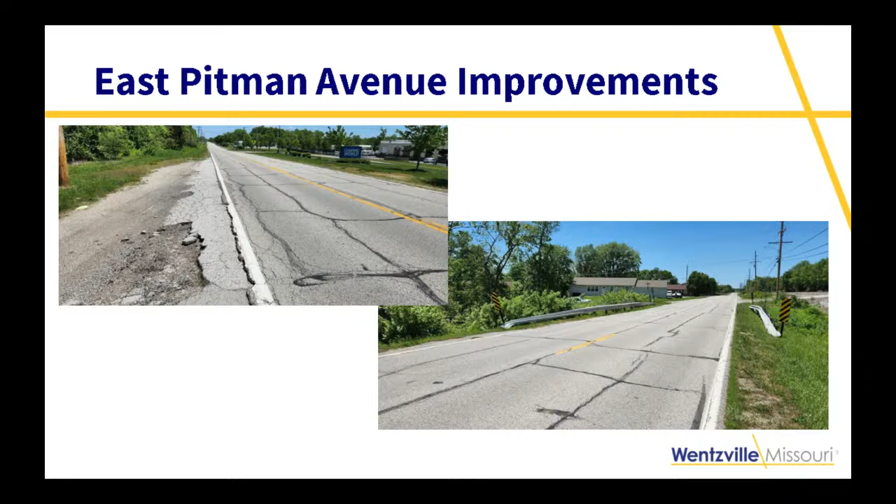So what we're proposing to do is build 2-foot wide asphalt shoulders on each side, and then repave the entire stretch of road, replace the guardrails, and then improve some sight distance at a couple intersections, particularly at that Pitman Loop Road.

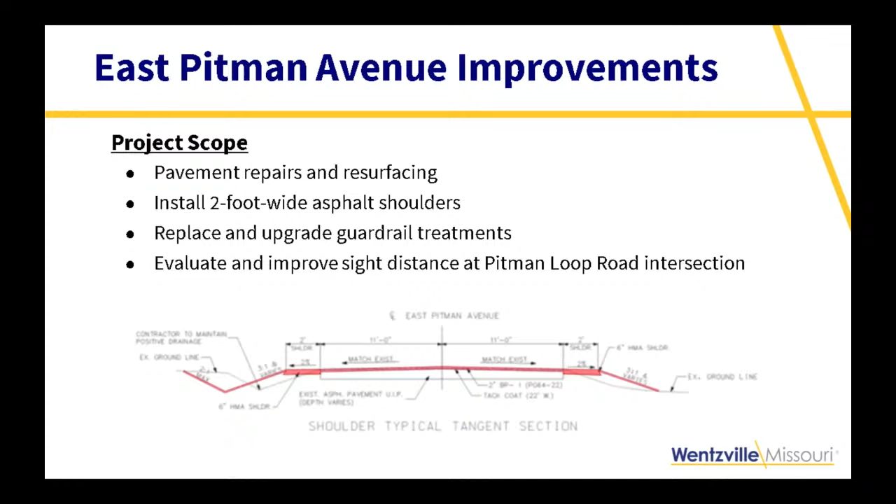This project, we had applied for CMAQ funding for the previous project. We applied for STP funding for this project here, but we're not on that preliminary list. So based on the city's capital improvement budget, we ended up just making this an 80-20 request at this point. We really weighed the options of doing that in different ways, but for better or for worse, the city's budget's not currently set up to ask for more than this request. But we do still think it's a valuable project, and if we're not successful in this round, we'd probably seek federal and county funding in the future.

So our third project is in concept very similar to the Pitman Avenue project. This is Wilmer Road. It's south of Highway 70, probably familiar with Interstate Drive. This project would start at Interstate and come down to the Peruque Creek Bridge. It's about a mile in length.

Just like Pitman, there are 2 11-foot wide lanes. There are no shoulders. There are some outdated edge treatments, I would call them, really just signs protecting a couple drop-offs. And the PASER rating is just about the same. This street got a rating of 5.

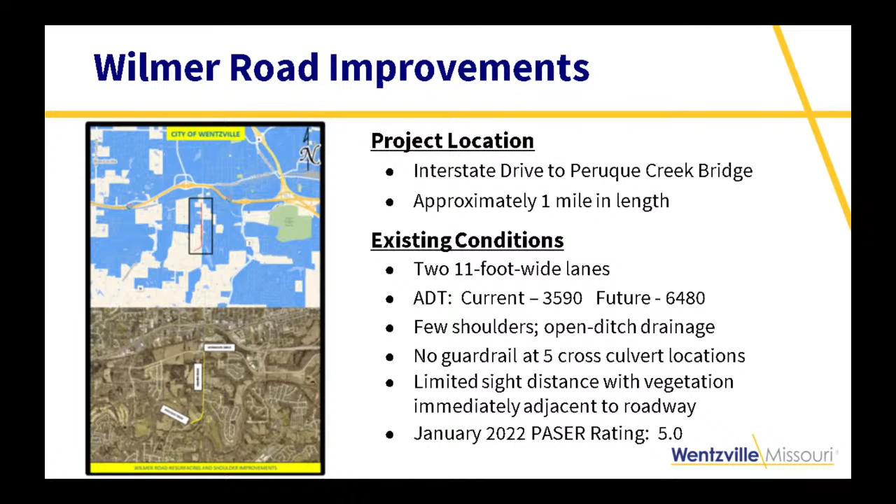So the pavement is getting to the point where we're looking at resurfacing it, but when we get to that point, we want to look at also some safety improvements too. That 3-foot wide asphalt shoulder would really help with some of these drop-offs that you have.

And then this is one of several culverts here. It's several feet down, and probably should have measured it, but if I were standing there, I'm not sure I'd be as tall as that culvert. And that sign is the only protection that we have. So we would propose to have that shoulder, but also have some guardrail treatments.

There's a new development going in right there on Wilmer, isn't it? Right before Interstate on the right-hand side. How many homes are supposed to go in there? I don't know, I'm just wondering. What is it going to do to traffic? Well, it's certainly going to increase. What's it going to do for stormwater? It's already going to increase traffic on it. I think the improvements to Interstate will help. But as we developed around the center of town and started moving out, some of these other roads get to be stressed a little bit more.

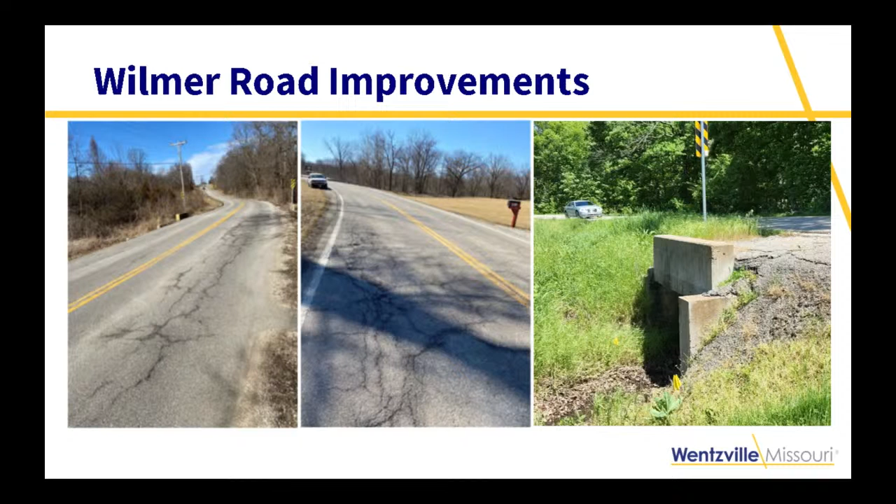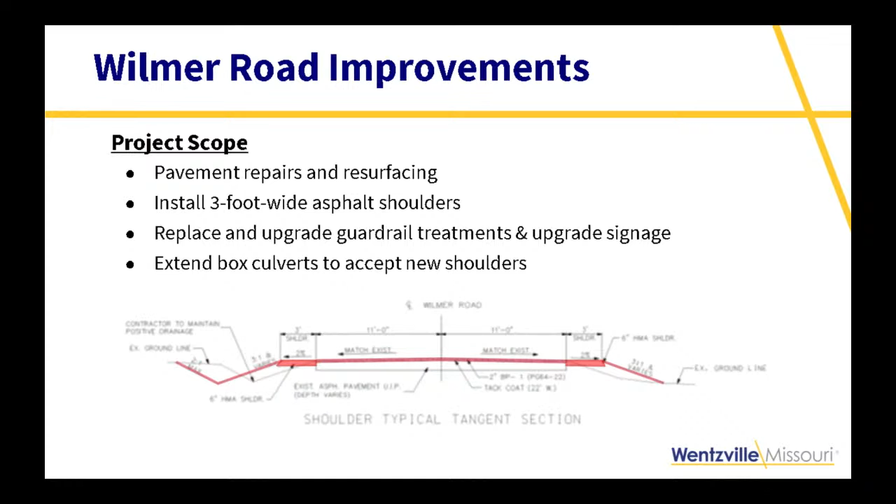So it's a very similar image to the one before with Pitman, so resurfacing and shoulders and the guardrail as well. Some of those box culverts will need to be extended a little bit to make room for the shoulders. So this project we are asking for 80% funding for, which comes out to be about $2.25 million from the county. The city's contribution would be about $560,000.

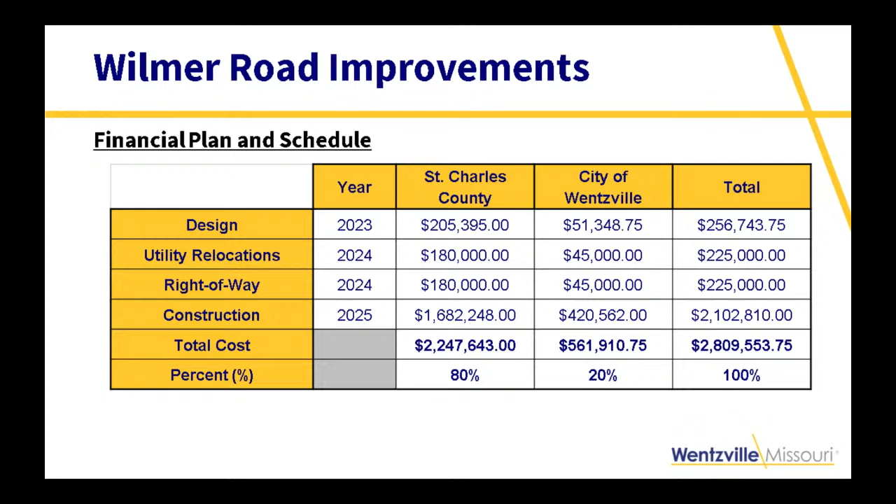With that, I really thank you for the opportunity. Happy to answer any questions, and I just thank you for your time. Any questions? Thank you very much. Thank you.